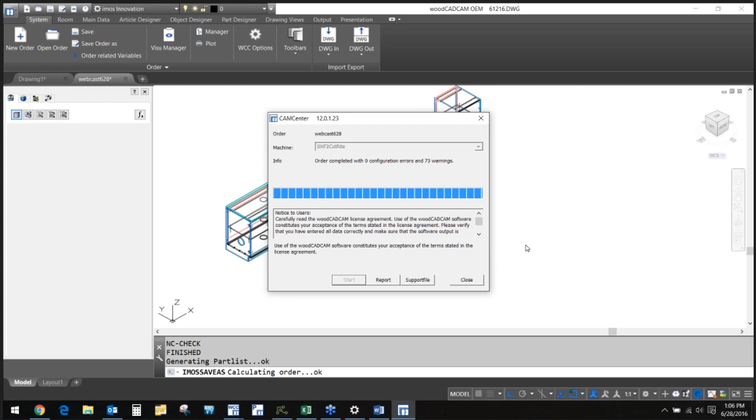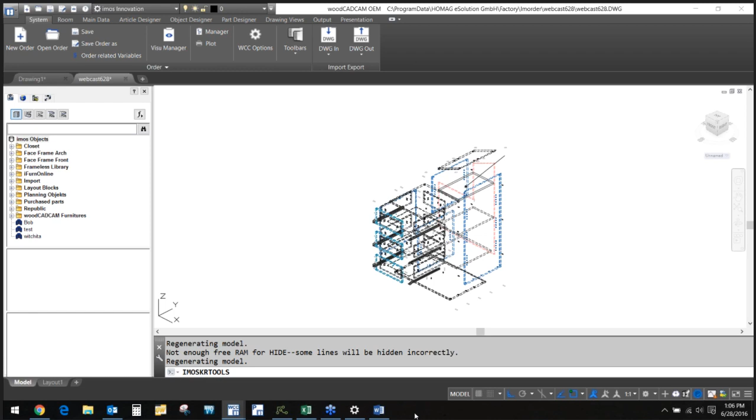Let's say, as an example, we have a manufacturing facility that utilizes nested-based manufacturing. So now we've made the appropriate files for that particular item. So as we are allowing the system to generate what we would think of as the WMF, or all of the detailed part-level drawings for production, I can go ahead and show you that from the Cut Rite side of things, we have all of the data that is available for being able to do production.

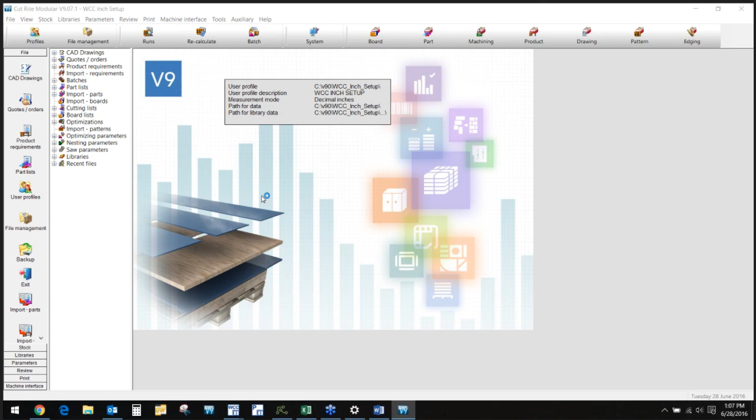So in this case, I'm just going to say real quickly, again, not a focus at all on engineering or nesting, but just so that we can see the live data working with this. Can even override here specific materials and what we want to do, and I'm going to tell this that we're ready to produce these files. So we will see now that we have the results real shortly.

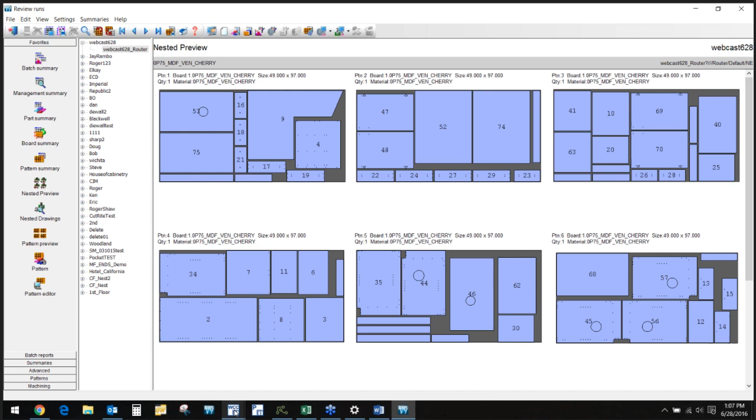So from this order, we could now look and see that for the things that we produced inside of that, even the oddly shaped stuff that we were working with, we have all of the manufacturing data done for that. So that works out really good to be able to work with. I'm going to issue one last command here to, let me move my docking station a little bit out of the way. And I'm going to tell this to go ahead.

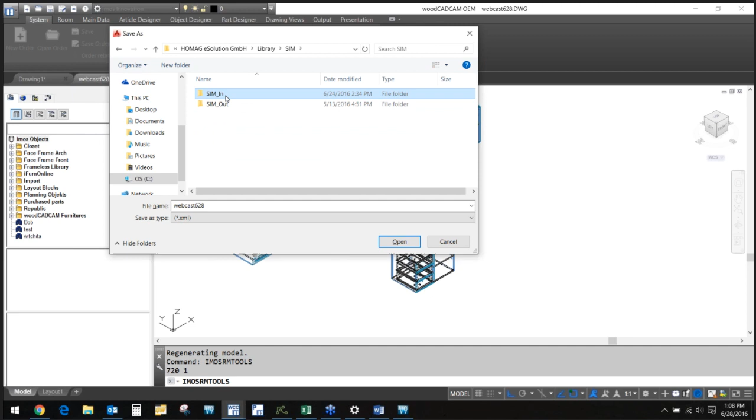I'm going to issue one more command while we're here from the command line to generate what is going to be an XML file, and I can put that wherever it is that I want. In this case, I have my path where I want it to go, so we've got webcast 628.

The very first thing that I want to do is to tell the system that I want to be able to import a file, and we want to be able to take this file we created, webcast 628, and bring it into Production Coach. And then we'll discuss the various functions that Production Coach can do for you, utilizing and harnessing the data that was already created from CAD/CAM.

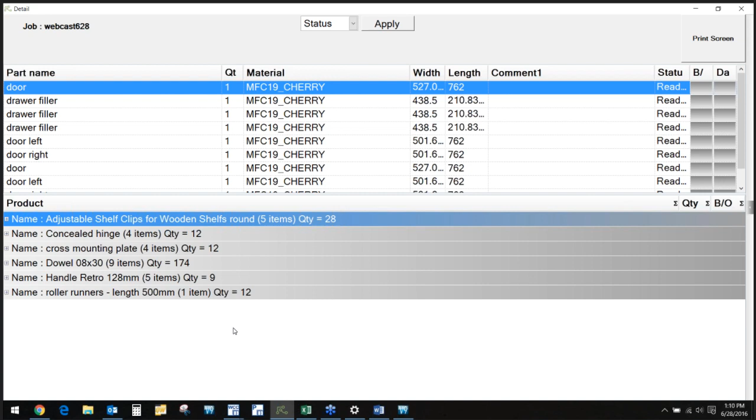Also, if we look at it from the summary, we could create the subassemblies that are required for this order, as well as all of the hardware that is going to be required to be pulled in order to complete the assembly and finally the shipment of this order. So you get to see a lot of details directly from the beginning. Not only details of the project or work order itself, but also of the product.

I chose this one just because I made it kind of an interesting angled, odd-shaped product. And we'll notice, first of all, that it's set as a status ready for production. So one of the things that you could do is manually select an individual item and tell it that it has now changed status, like I started cutting.

You also would be able to do a multi-selection and change the status for all of the items within it. These items I haven't changed, but if we went back to the status, we would now see that we did all the cutting that was required for these items except for the kitted items in this case. So we've started to make progress for this job.

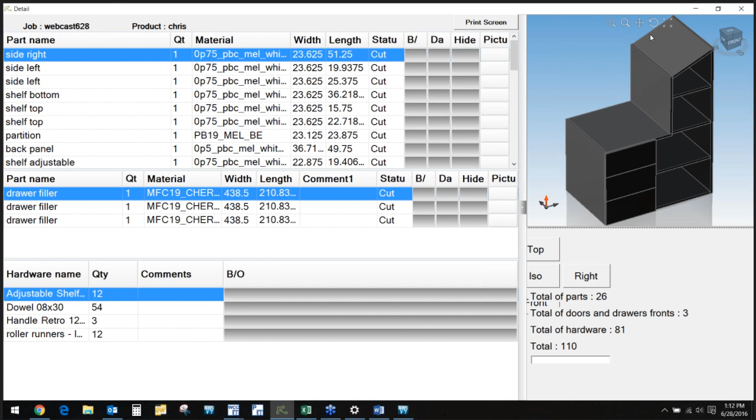Again, if I'm highlighted on a single product, I would also have the ability to tell it that the product itself was damaged, or I'm going to click into the details of this product. What I want you to notice is that Production Coach has the ability to generate a live rendering of the product on the fly, and so that makes it very easy.

So you could have literally just scanned a barcode of a part label, and if you did so, I'll select on this, it would give you the same emulation, where you can see if I select a different one, it is showing me now the position of that part within the assembly.

So imagine that you're on a custom bench getting ready to do assembly of a fixture that you haven't seen before. You have a collection of parts, and so now you could figure out exactly where those go in the assembly.

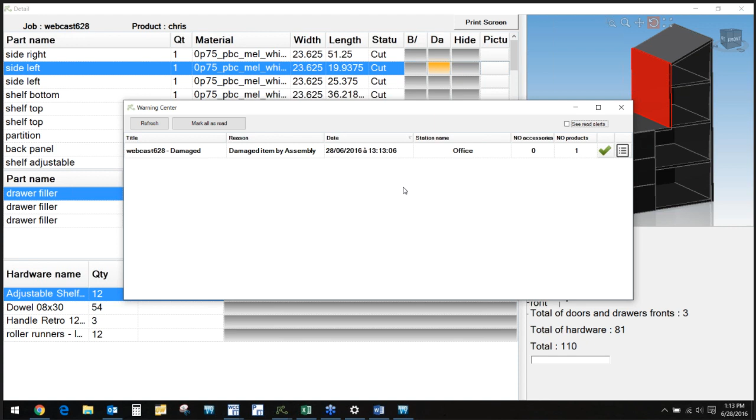This can allow decision makers to have instantaneous alerts so that real-time decisions can be made about what happens. Notice that it is separating out for me all of the parts from the fronts, and again, if I wanted to, I could hide any of those to be able to see things behind it. And here's all the hardware that's required. So it gives me a lot of possibilities.

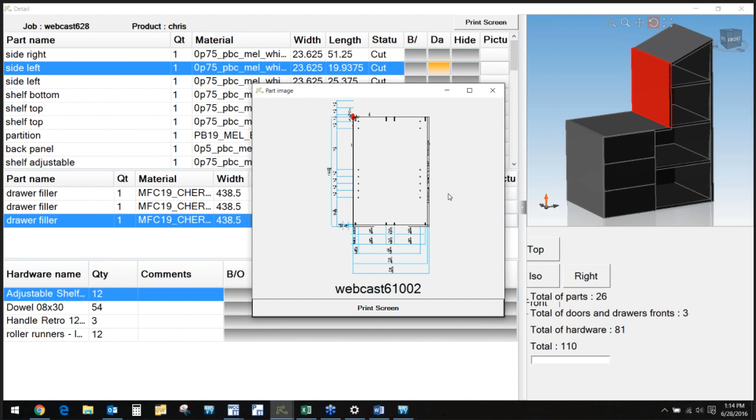Also, if I wanted to drill in and see even more details, I could click on the picture. So here's the WMF, or the drawing files of the parts that were created from the woodCAD CAM software. So that gives me some real ability to look at the machining operations that were on that, to make sure that I have all that I need to work in this particular case. So I'm going to go ahead and close this window back up, and we're back to our original screen.

There are some additional things that I want to show you. First of all, I want to do a multi-select on these loose items, and I'm going to tell them that I want to make a kit. I'm just going to call this kit 628 for today's date. In creating that kit, literally in a click of a button, I've now generated a label for this as well. And so I'll give that a matching name and just throw it here on my desktop real fast so that we can look at this.

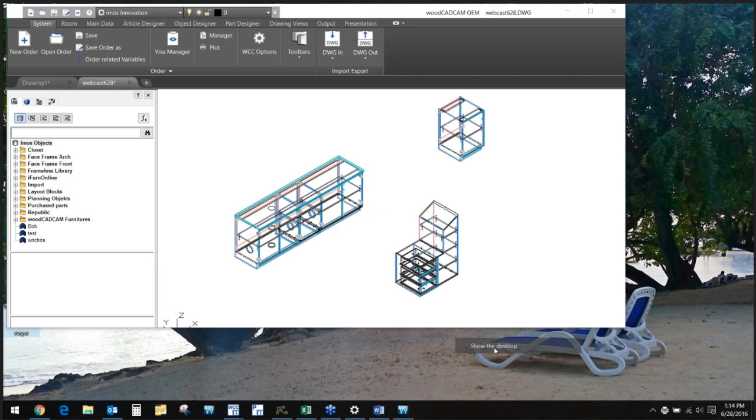Today, I don't have physical things to be able to show you, so I'm doing a lot of this in a manual way to select. But let's tell this that we've made it through, and that we have actually shipped these. The reason that I want you to see this is I also want to give you an electronic version of the shipping report so that you can see that these were the items that were to be shipped.

Here's the quantities. Here's actually how many were, and here's how many are still back ordered or not made it on the truck. Well, that's because of those kick plates in that kit. So if I had the barcode scan, that would happen. In today's environment, what I'm going to do is emulate this and tell this that I want the status to be marked as shipped. So now, if we looked at it, we would see that everything made it onto the truck, including the loose items, and that those are all available for us. So that makes it really, really nice to work with for sure.

As we're working across, you'll see that we have the same warning center available. So any station that you have set up to accept that would be able to see those things highlighted. We could also look at the performance of our factory as to what we've either shipped, kitted, assembled, whatever it is that you want to know. And so you could be giving production a real view of how the progress is going, which many studies have found, just by making that information available, keeps people on pace.

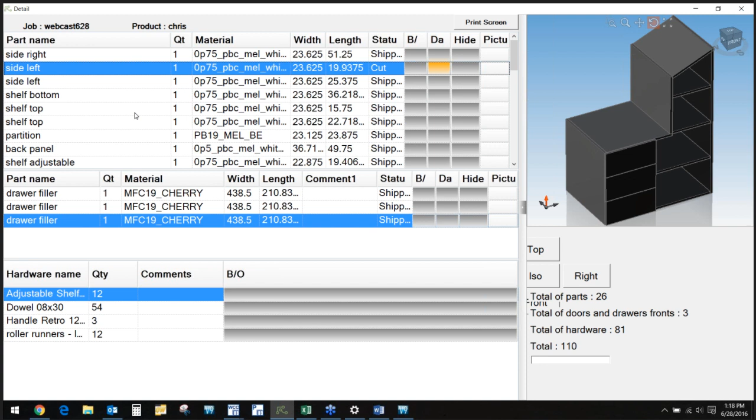You could have a scanner configured to mark the status of something. For example, a scanner at assembly could automatically mark things as assembled when scanned. You could also have a scanner set for damage, shipped, or whatever values you want. The system is highly configurable for whatever you want to accomplish, which makes it easy to work with.

Looking at the data we have, here are various jobs in the system. I'm going to close this long enough to open a new view. Since I'm running with just one computer, I'll be moving from one station to another. I've imported a job now called 004. For a moment I'm going to close down and open up as a kitting station.

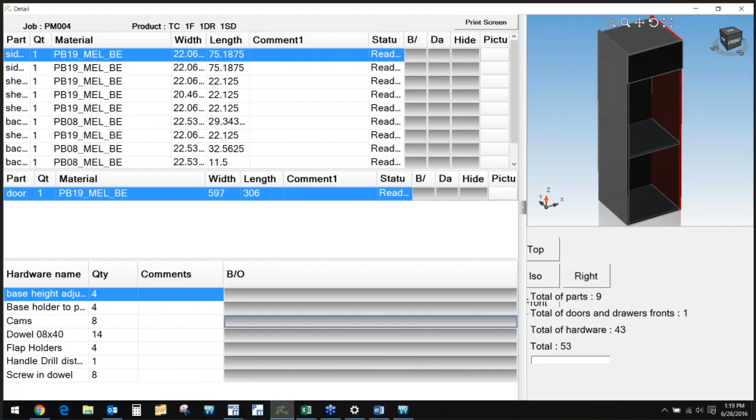Austin, I think this will answer your questions better. It wouldn't matter what I was clicked on, it would give me information about a product. If I'm set in info mode, I can select something and in one click find the order it was attached to, find the part it was attached to, and see where it is in the assembly. I could click that one button and make a damaged part alert just by scanning the barcode of the product. I hope that helps make sense.

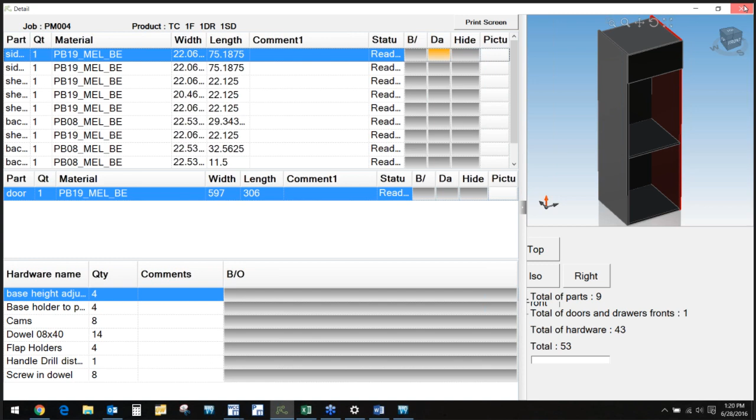There are two areas I want to show you. One is related to kitting, and I'll use a term synonymous with this called sorting. This is what I'd think of as a rack where I'm looking at parts to make sure they're good, and I want to get them put into various racks, because in my work order I have multiple products. So I need to sort these out so the person assembling the parts has an easy way to know all the parts are available.

So I'm going to do some scanning. You'll notice I've just scanned 2, now 3, and I'll do a few more. Now we're up to 6. We're almost done. If I scan the 10th part of this, we'd see that we have a damaged part available. If it's green, it shows you it knows it's ready to assemble. So one of these has been marked.

There's a number of things I can also do. I could tell this that I want to move parts from one station to another, so I'll say I want to relocate a rack. Now these have been moved to a different rack.

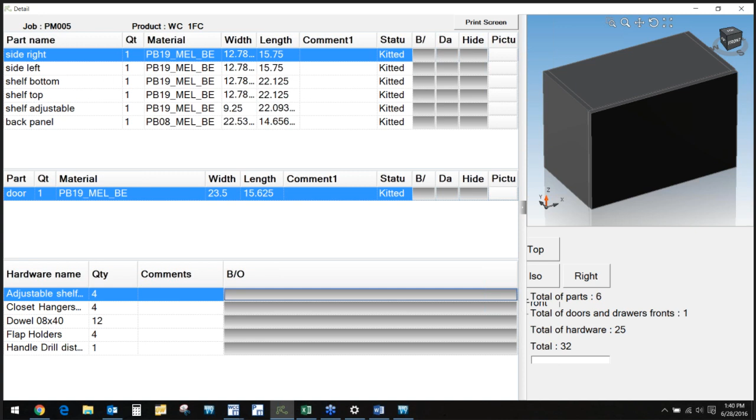One last thing that I want to scan for you today is I'm going to scan a kit, and so now we would see that by doing so, we now have the status moved to kitted for those particular items.

So hopefully you can see that you can easily configure the system to be able to accomplish with very little effort from the production personnel to be able to give the information that's going to be helpful to be able to complete manufacturing in a really, really nice way.

Yeah, so just to be clear, all of the information was generated in an outside system. This only brought in, so we could see for this product, we could see the fronts that were associated with it, we could see all the hardware, but it means that the system that you're using has to be able to do that.

It's not generating any form of parts, assemblies, anything else. It is only reading that data, again, from either CAD CAM software such as woodCAD CAM, Cabinet Vision, Microvellum, or from data that might be coming from an Excel file or CSV file.